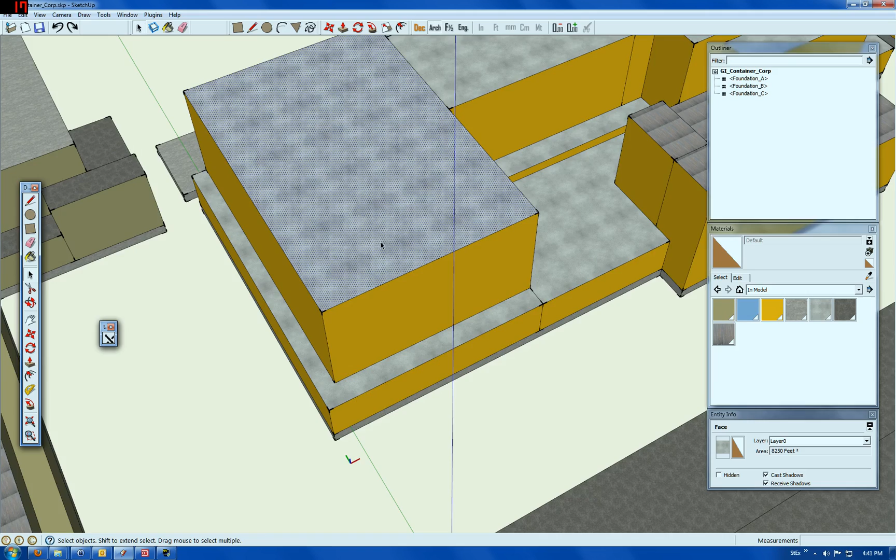Continuing again with the construction of the model, you can see I've added a couple textures to the roofs. This one over here is just a roofing stone kind of texture. This is something similar - I don't know what to describe it as, but I've seen it on roofs. This one over here is just a temporary placeholder.

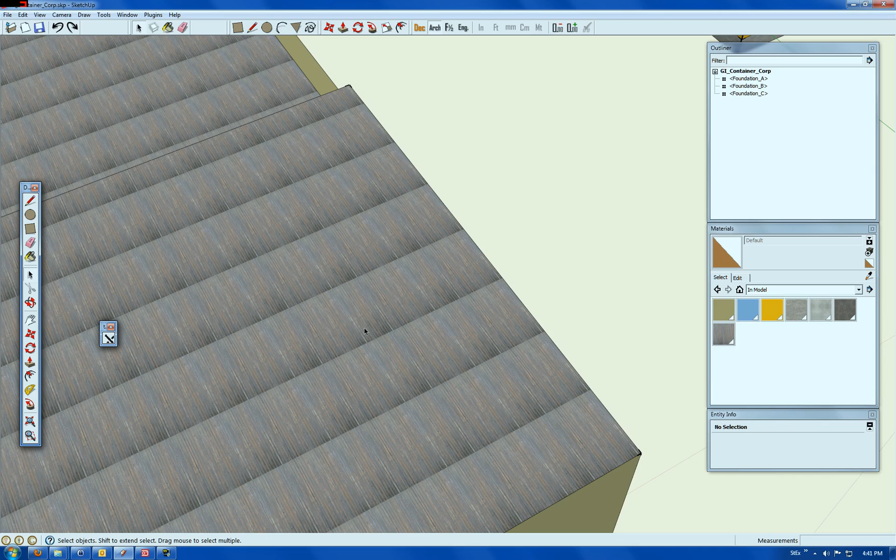I put something down here that serves as a reminder that the Sanborn map indicates there's some kind of metal in the roof. If it's a small roof, I just regard it as an indication that it's a corrugated metal roof. This one's a really big roof, so I suspect it's something different. Over here probably is a corrugated metal roof, so I'll go with that. I'll figure it out later on.

Right here, this is the building I want to start the work on. It's what, 75 by 100 and something - 75 by 110 seems like a good size. And I want to begin with the parapets.

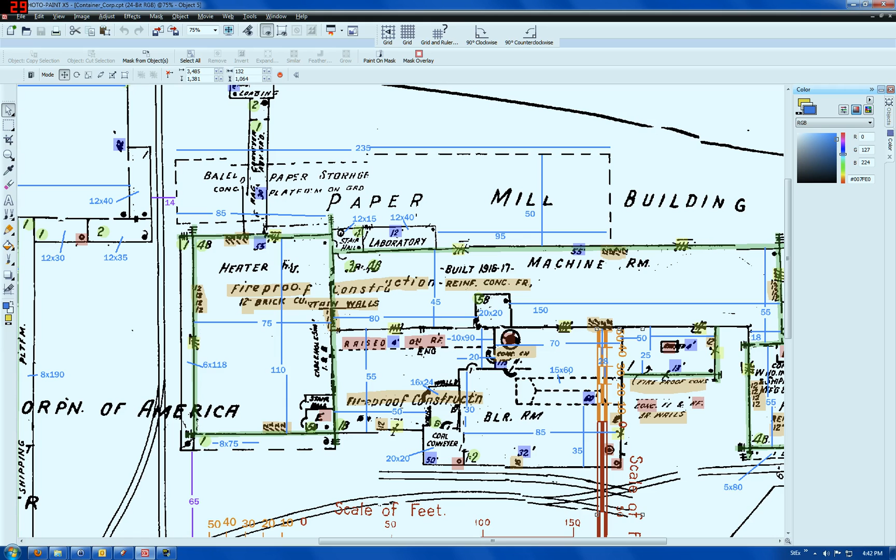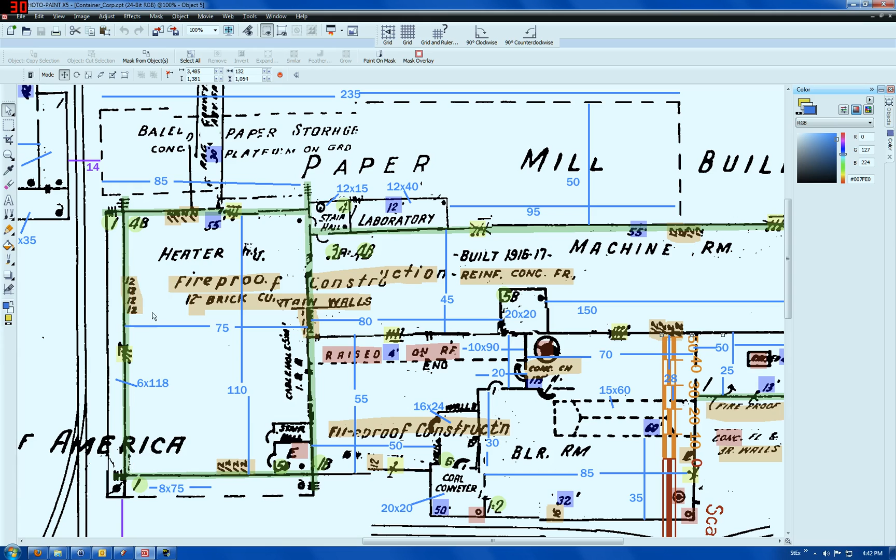Returning to the Sanborn map, I see there's this green line around the outside - that's the parapet. The important thing to note is how many of these hash marks there are. Each hash mark represents a 6-inch increment in height. A quick check here shows they're all the same, so it's an 18-inch high parapet, and the indication of wall thickness is 12 inches. So basically I need a 12 by 18 parapet.

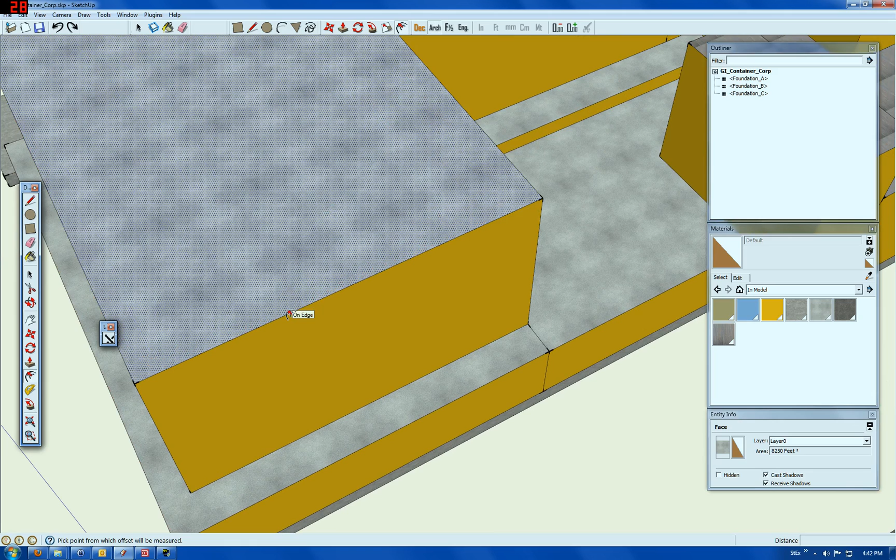And the way I make that is pretty simple. You start by highlighting the roof, selecting this tool over here - it's like two concentric circles with an arrow. Pick that tool, bring it over to the face you've selected, line it up on the edge, then hold your mouse key down and push in - you can see SketchUp doing these lines. You just hold your mouse down, push it in some distance, let go, and without doing anything else, type in how many inches or feet you want that inset to be. So I've typed in 12 and hit enter, and there we go - it's got a 12-inch inset.

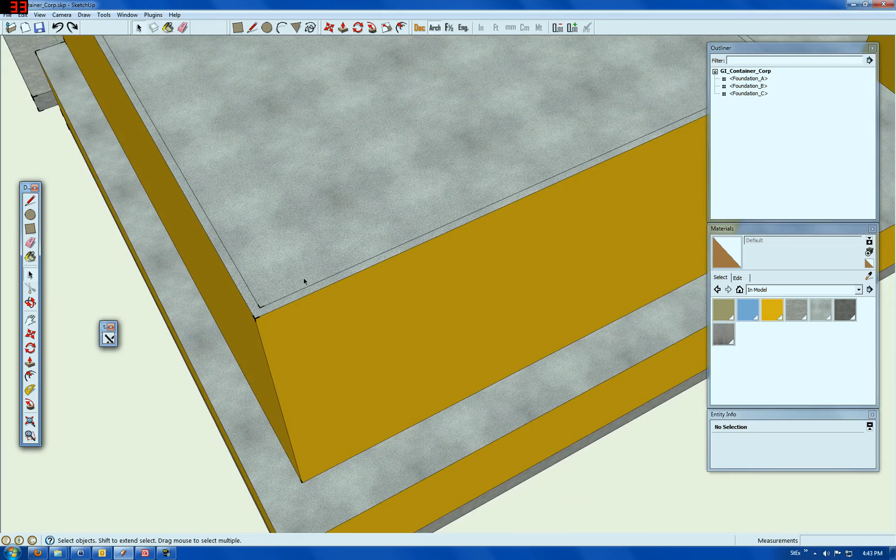Now I'm going to raise this up 18 inches, but before I do that, I'm going to add this color to it. The reason is that as I raise this face, it's going to raise something on the inside, and I want the color to apply on that inside face. So I'm going to raise it up 18 - I've typed that in, and there we go.

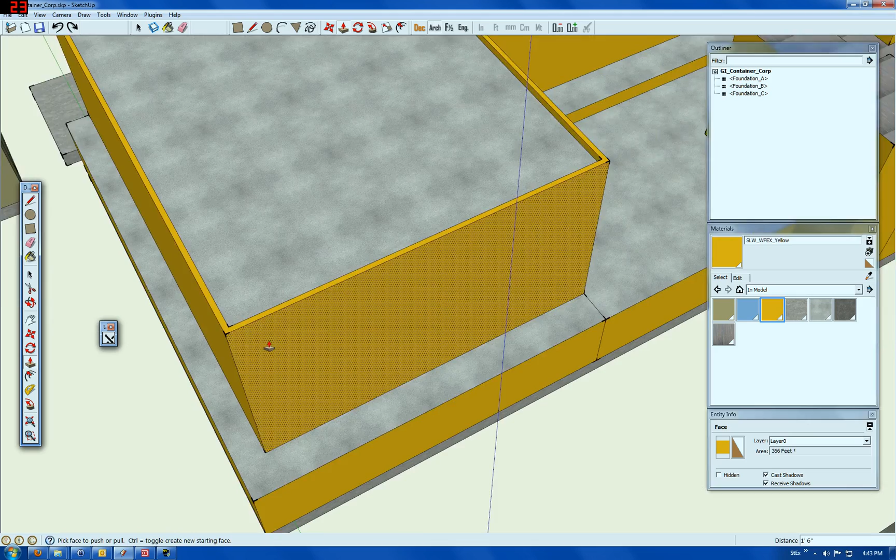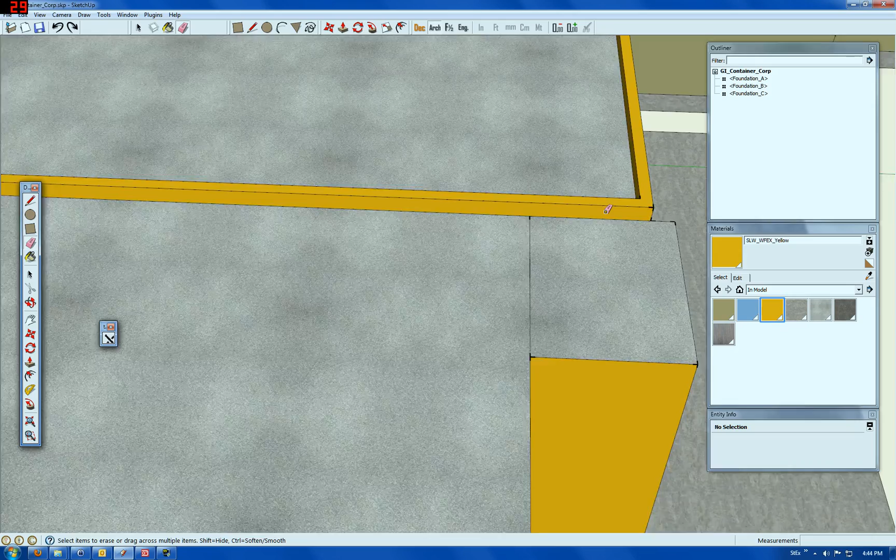We can see that I've picked up a couple endpoints here that I don't need. I'm going to get rid of those two, and I'll show you where they came from - over here on the other side, they came from these endpoints here. SketchUp will basically carry endpoints around with it all the time. When I created this inset, it took the endpoint from here and put it on the other side. When I raised it up, it took the endpoint that was on the other side and brought it up to the top. So you want to keep an eye out for stuff like that and delete them where they occur.